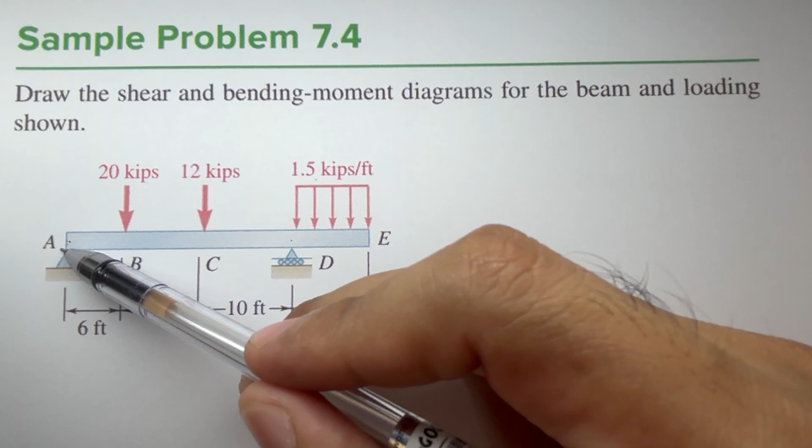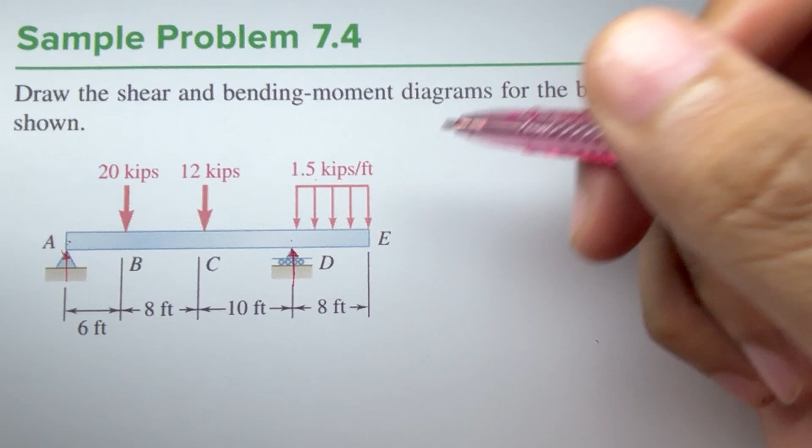To get the reactions at point D and point A, we can use summation of moments at point A to get the reaction at point D. So, summation of moments at point A.

Before we can do summation, we have a distributed load here. What we do is replace this distributed load by a concentrated load applied at the centroid. Since this is a rectangle, its centroid is located along this line at the middle. Since the whole distance is 8, this should be 4.

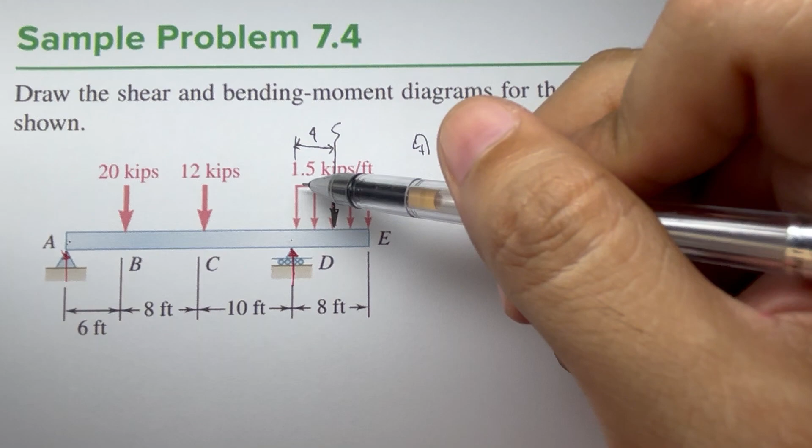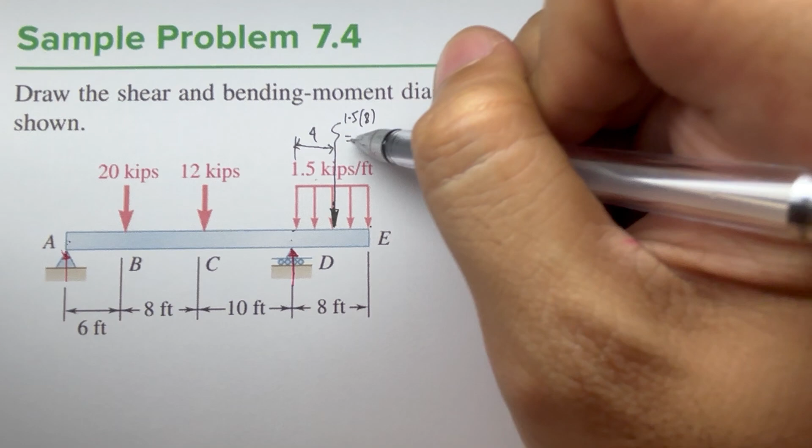So what will be the magnitude? The magnitude of the concentrated load replacing this distributed load is just equal to the area of this distributed load, that is 1.5 times 8. We have this equal to 12 kips.

Now we're ready to sum all the moments at point A. At point A, this one is clockwise, so negative. We have positive and negative. Negative 20 times the moment arm, which is 6. This one is negative 12 times the moment arm, that is 8 plus 6, we have 14. This one is D, which is positive, times its moment arm.

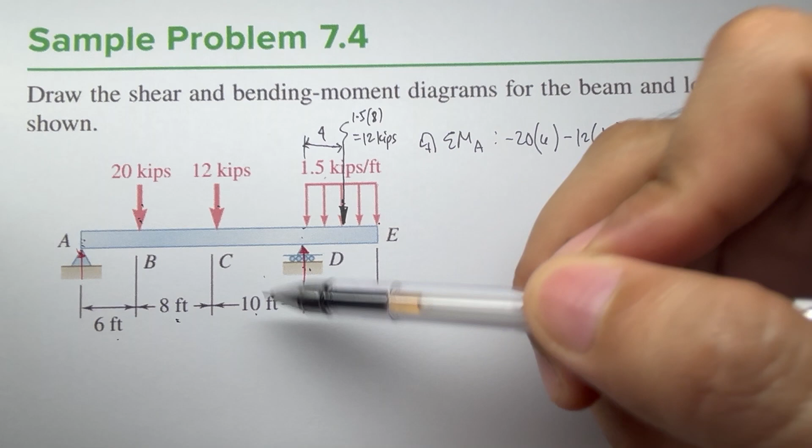We have 6 plus 8 plus 10, we have 24. Lastly, for the concentrated load, we have 12 kips negative, kasi clockwise, times its moment arm, which is 8 plus 6 plus 8, 14 plus 10, 24 plus 4, we have 28. That is equal to 0.

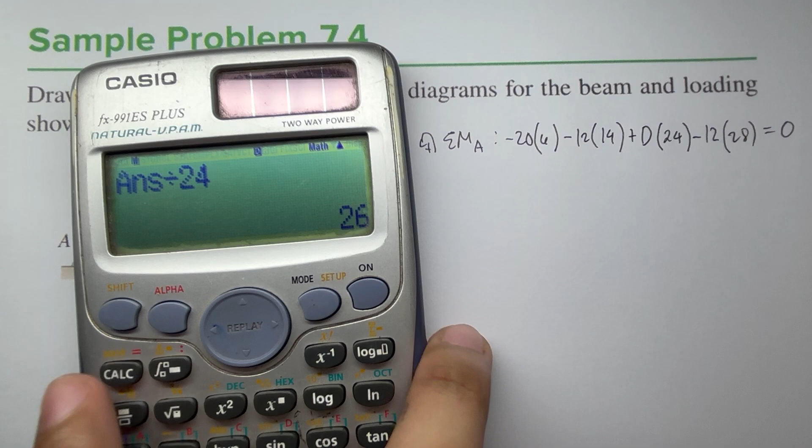If we solve that, we have 20 times 6 plus 12 times 14 plus 12 times 28, divided by 24, we have D equal to 26, and it's positive 26 kips. So our D here is equal to 26 kips.

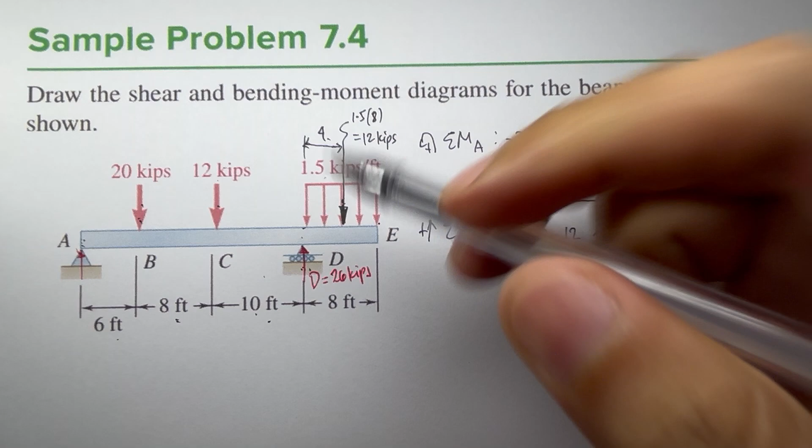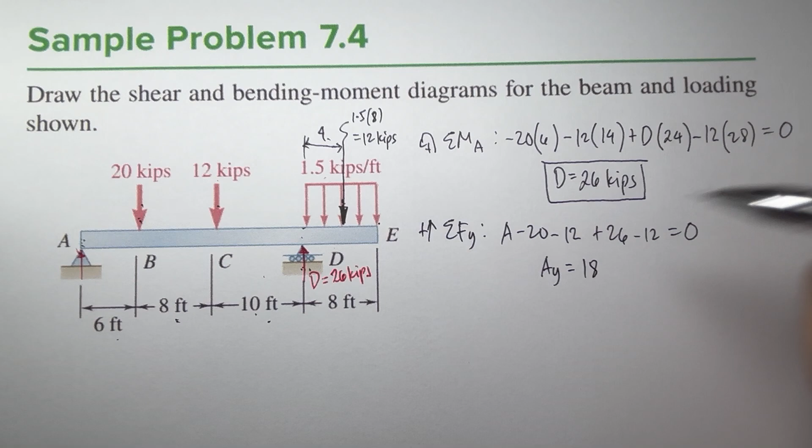How about AY? We can use summation of forces along Y, positive upward. That would be A positive. We have negative 20, negative 12, positive 26, and negative 12 equal to 0. If we solve that, we have 20 plus 12 plus 12 minus 26, we have 18. So our A here is equal to 18 kips.

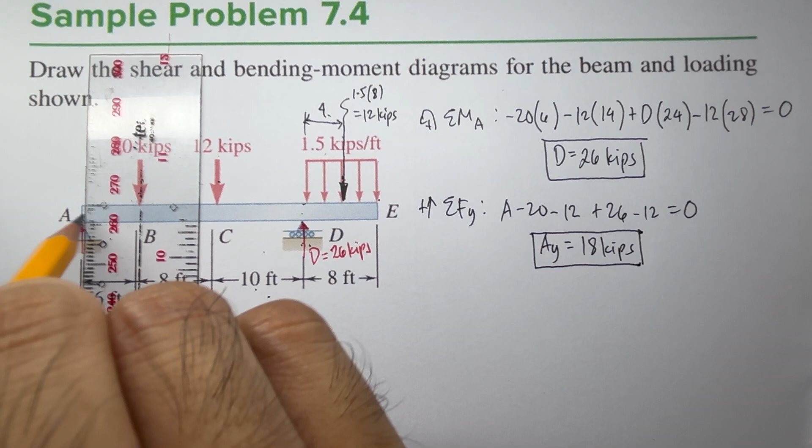Okay, now we're ready to draw the shear and moment diagram. What we do here is project every point. So we have 5 points here, point A, B, C, D, and E.

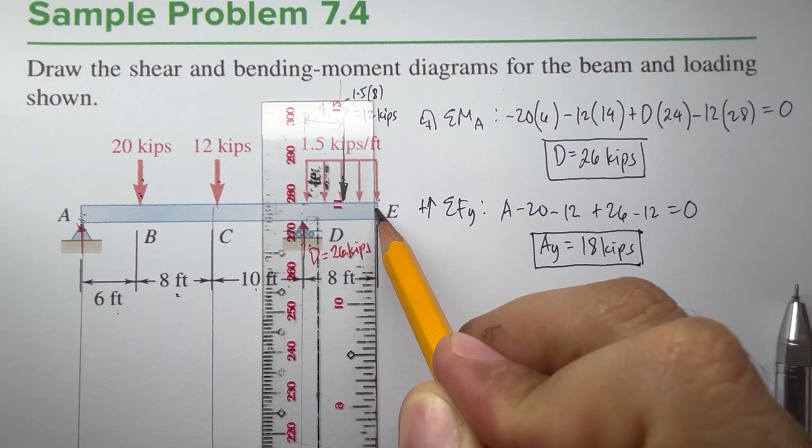From our previous video, we said that our shear curve is 1 degree higher than our load curve. Same as with the moment curve, our moment curve is 1 degree higher than our shear curve. So if we say, for example, our load curve here, we have our shear curve and our bending moment curve. If our shear curve is linear, that is x to the 1, linear...

Since our moment curve or bending moment diagram is 1 degree higher than our shear diagram, this one becomes quadratic. If our shear curve is linear, our moment curve is quadratic, kasi 1 degree higher. So if our shear curve is 1 degree higher than our load curve, our load curve would be x to the power of 0, or constant.

Now how about if our shear curve is x to the 0, or constant? What would be our moment curve or bending moment diagram? That would be x to the 1, or linear. How about the load curve? Since the shear curve is 1 degree higher, the load curve would be 0. So if the load curve is 0, the shear curve would be constant, and the moment curve should be linear. So that's it.

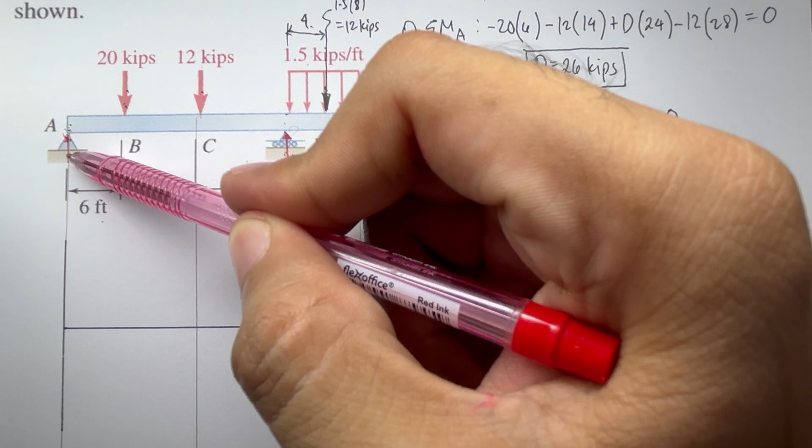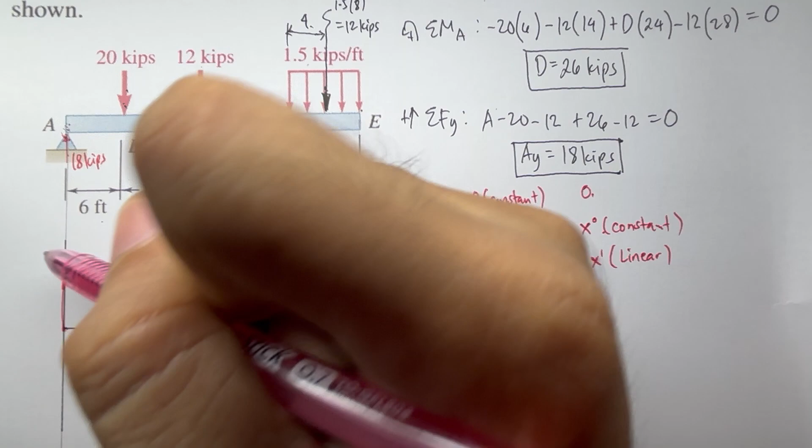Now let's draw our shear diagram. In drawing our shear diagram, we look at point A first. A experiences a shear force at this point, and its value is 18 kips. So therefore, at point A, the shear diagram would rise to this point. It should be at 18 kips. This is for our shear.

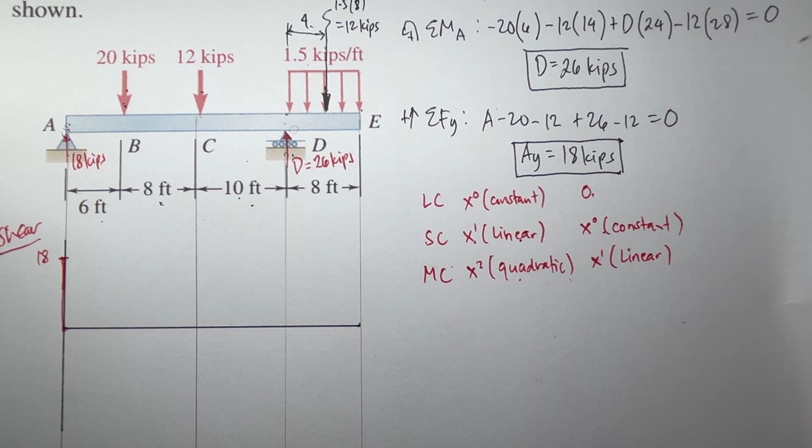Kanina sabi ko, kung yung load curve natin from A to B ay wala tayong nilagay na load, therefore yung load curve natin is 0. Kung yung load curve natin is 0, yung shear curve natin is x to the 0 or constant. Ano yung graph ng constant? Flat line lang. Hindi ko pa na-project itong B natin.

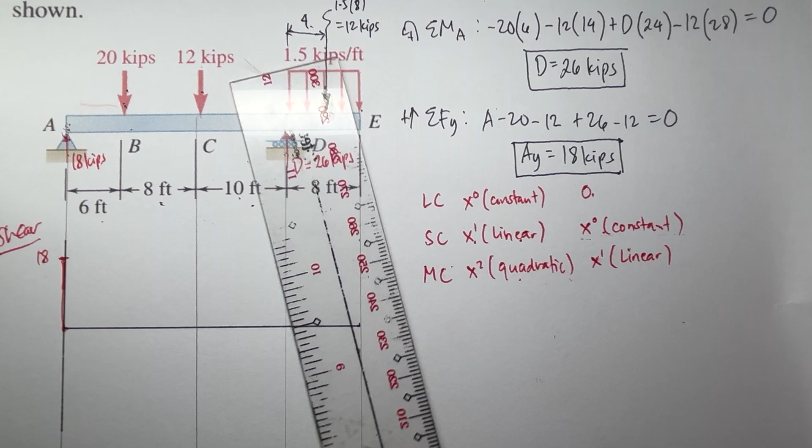So somehow yung B natin, ayan. So from A to B, yung shear natin is constant. So expected that sa ating moment curve, magiging linear yung graph natin.

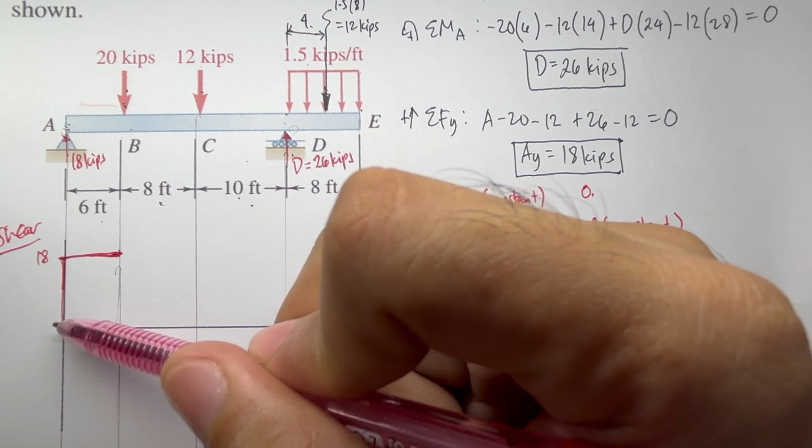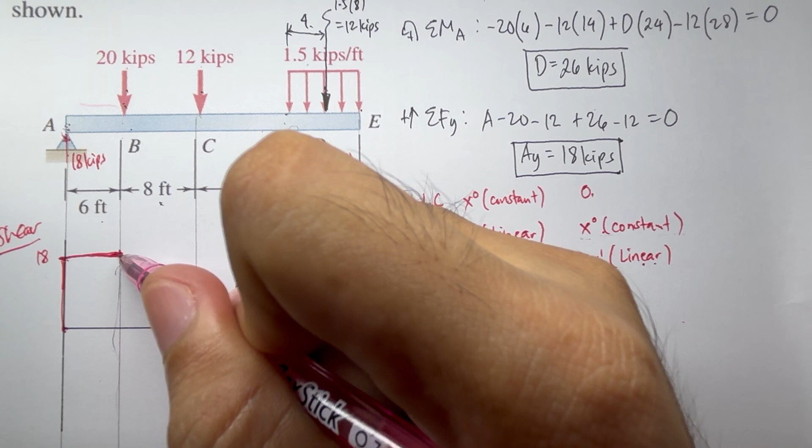Okay, so ayan. So from point A, nag-raise tayo ng 18 kips, and then to B, constant, and then from B, bababa ka ng 20 units. Kung bababa ka ng 20 units, so yung height na ito is 18. So ito siya is negative 2, kasi 20 minus 18, we have negative 2.

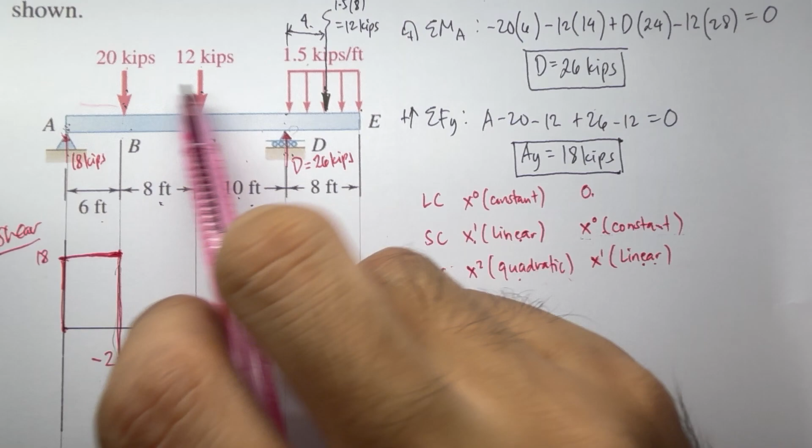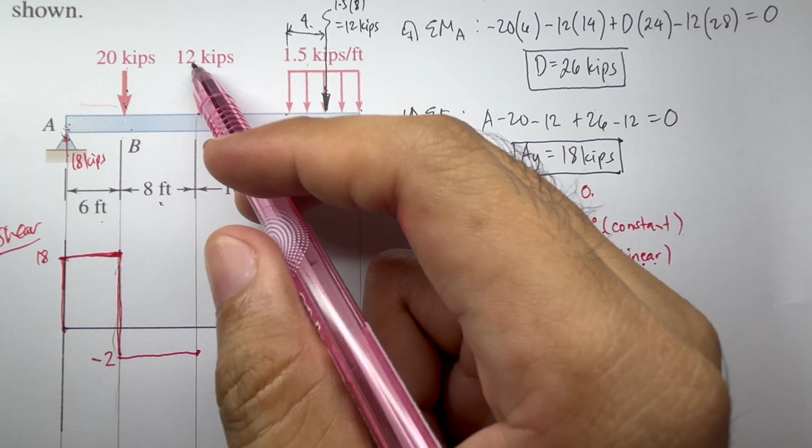And from B to C, wala tayong load, so therefore constant din yung shear natin. Constant din yan. And then from C, meron tayong shear na 12 units downward, so bababa tayo by 12 units.

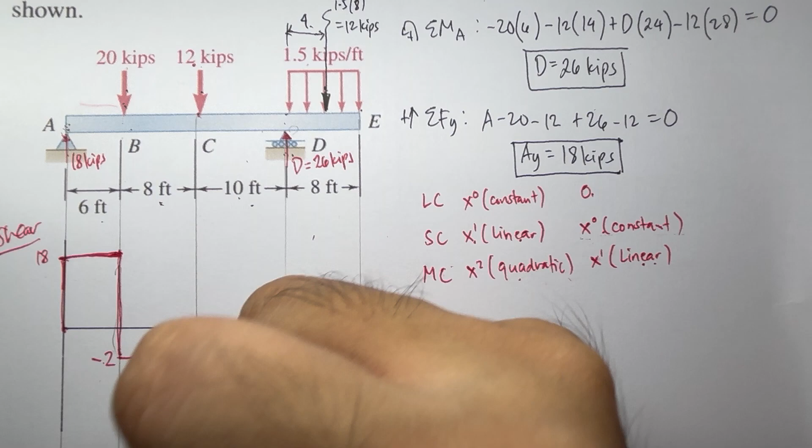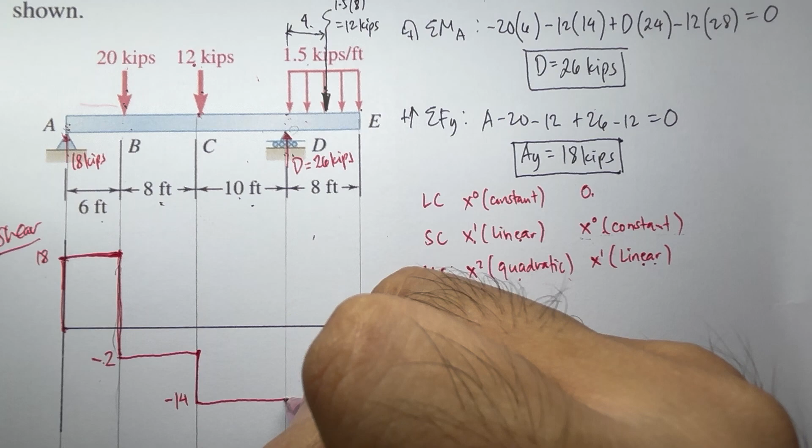So 12 units downward plus negative 2, we have negative 14. And from C to D natin, since ito siya is 0 din yung load, so therefore yung shear natin is constant. And then yung D natin dito at point D, tataas daw tayo ng 26, so magdadagdag tayo ng 26 units upward dito. So kung ito siya 14, dapat yung total 26. This should be plus 12, kasi 26 minus 14, we have 12.

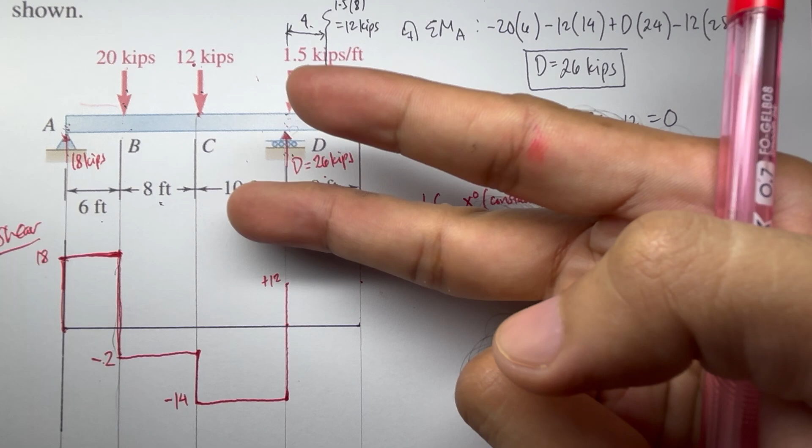Now, from point D to point E, meron na tayong load, at yung load natin ay constant. Di ba yung constant na load, yung shear natin should be linear. Kung linear yung shear, dalawa lang yung kailangan nating points para makagawa ng linya. So since meron na tayong 1 point dito, hanapin natin yung shear at point E para dalawa na yung points natin. Paano natin mahanap? We have our formula as

V2 minus V1, sa case na ito VE minus VD, that is equal to the negative area under the load curve from D to E. Ano yung area na yan? Itong area na ito. We have rectangle, so base times height. Ano yung base? We have 8. Ano yung height? 1.5. So 8 times 1.5, we have 12.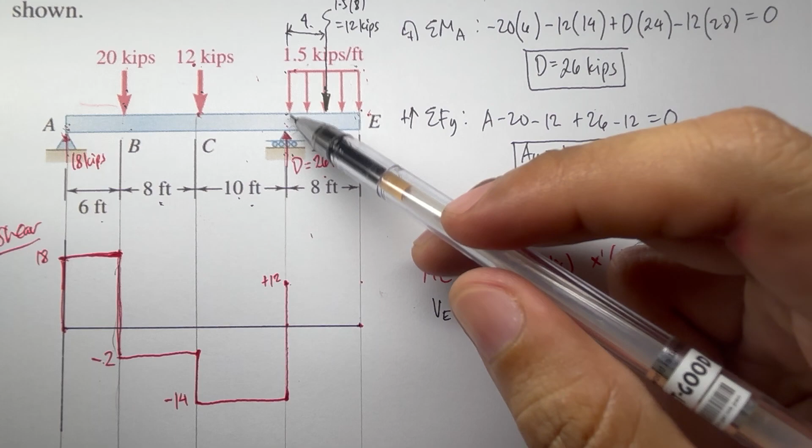So this one here, we have negative base, which is 8, and height, which is 1.5. Ano yung VD natin? Yung VD natin, this one here, is 12. So therefore yung VE natin is just equal to 12 minus 8 times 1.5, which is also 12. So therefore yung VE natin is just equal to 0, at this point.

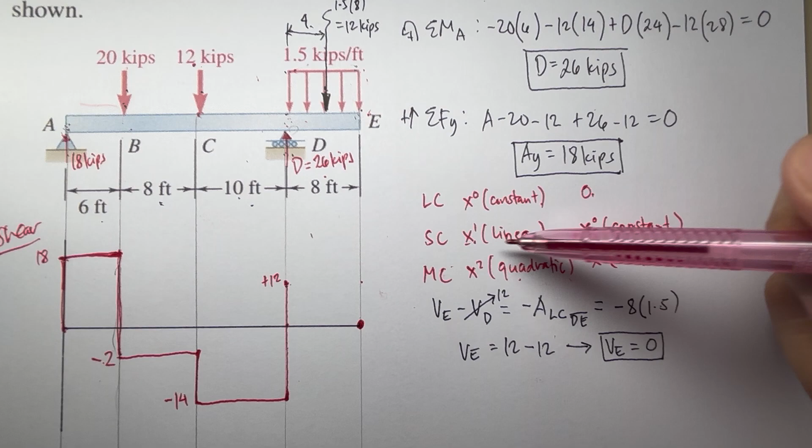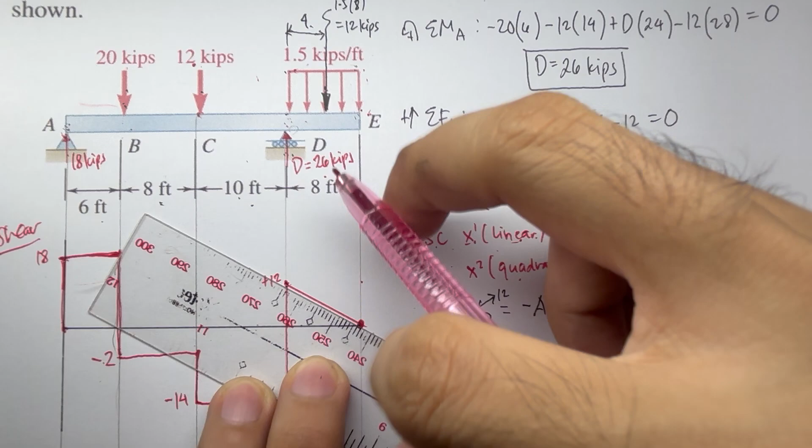Ano yung sabi natin kanina? Yung shear curve natin is linear, so therefore point D and E is connected by a line. So technically, ito na yung shear curve natin. Ayan. Now let's proceed with our load bending moment diagram.

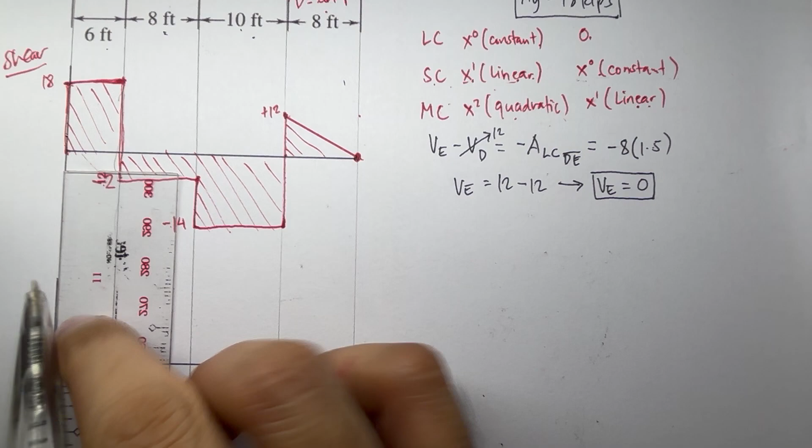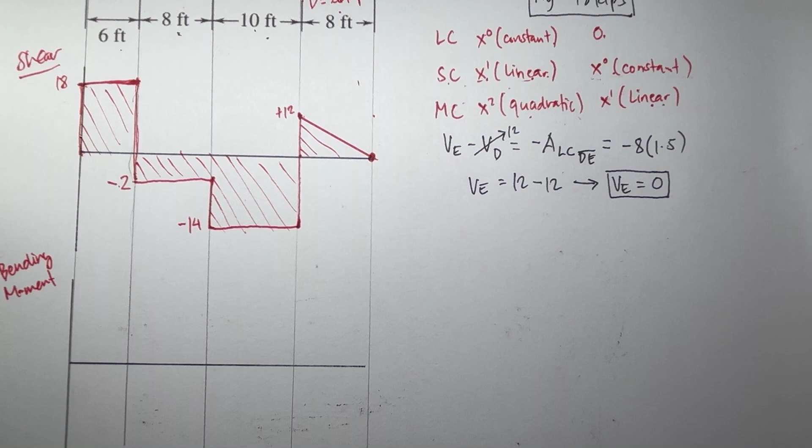So for our bending moment diagram, drawing lang tayo. Ayan. So this one here is for the bending moment. Okay, so yung bending moment natin, ano yung formula natin? We have

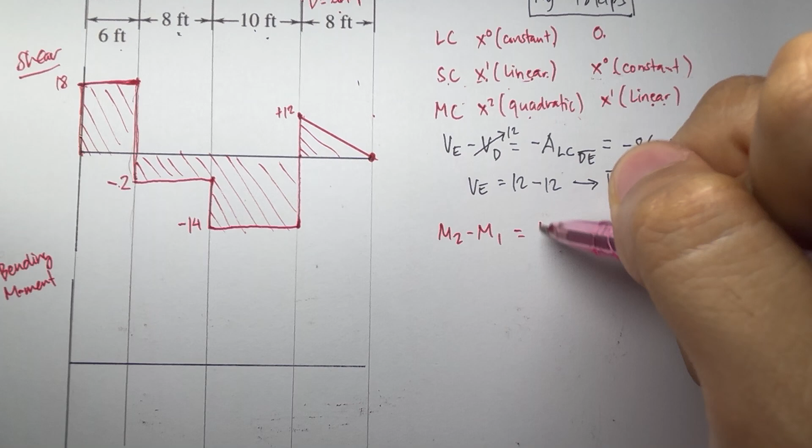M2 minus M1 is just equal to the positive area under the shear curve from 1 to 2. So ayan lang yung formula. So if we try to apply this expression here to create the bending moment, we have how many points here? This one is point A, this is point B, this is point C, point D, and point E natin.

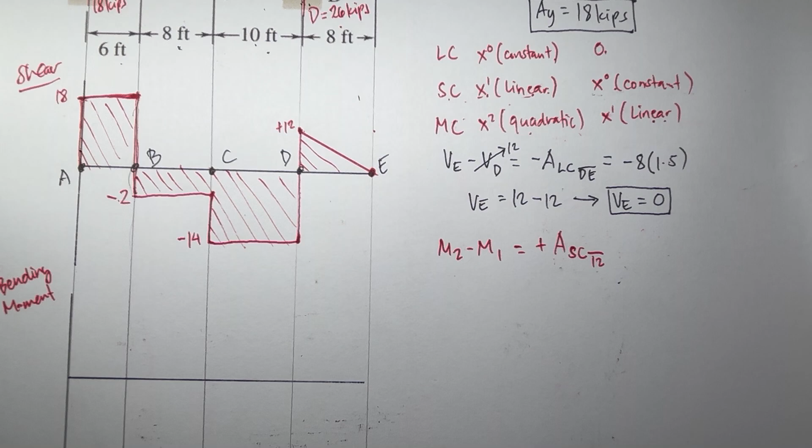So applying this equation here, we have MB minus MA is just equal to the positive area under the shear curve from A to B. We also have MC minus MB is just equal to the positive area under the shear curve from B to C. And then we have MD minus MC is just equal to the positive area under the shear curve from C to D. And then lastly, we have ME minus MD is just equal to the positive area under the shear curve from D to E. Okay, so solve lang natin ito.

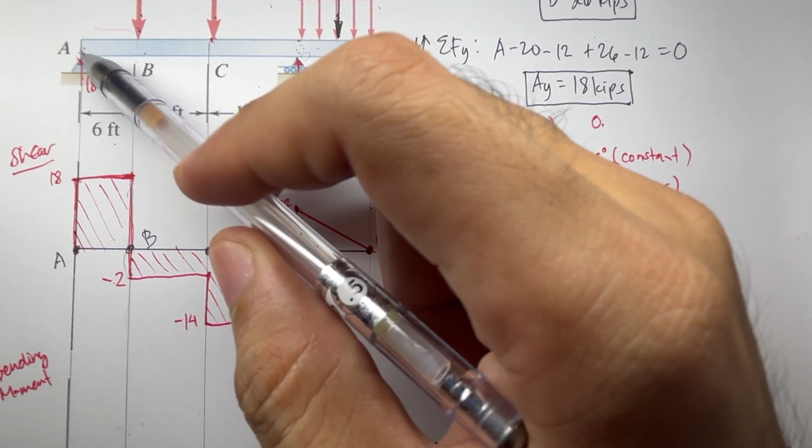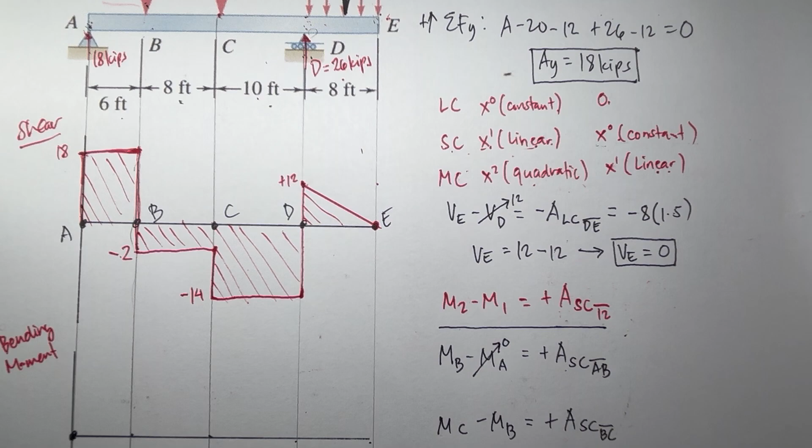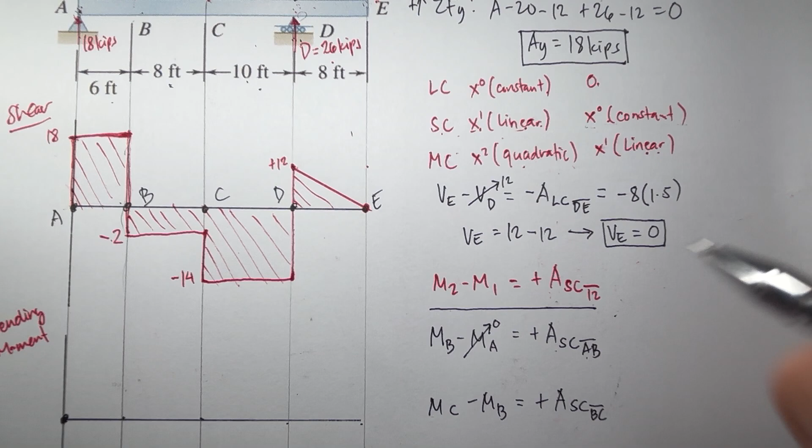Again, ano yung area nito? So kung ito yung A, B, C, D, E na isolve natin, may moment ba tayo sa A? Wala tayong moment, so therefore yung moment natin at point A ay 0, directly 0. Kukunin lang natin yung area under the shear curve from A to B. Ano daw yung area na ito? Area na ito is just a rectangle, so that is base times height. Ano yung base? 6. Ano yung height? 18. So this one here is 18 times 6.

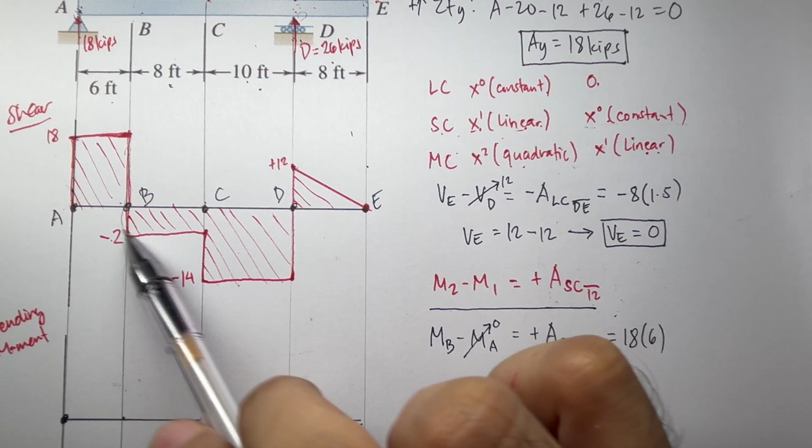The same as with here, from B to C. The area here, what is it? Base times height, or 8 times negative 2. How about this one? Rectangle pa rin, base times height. So that is 10 times negative 14.

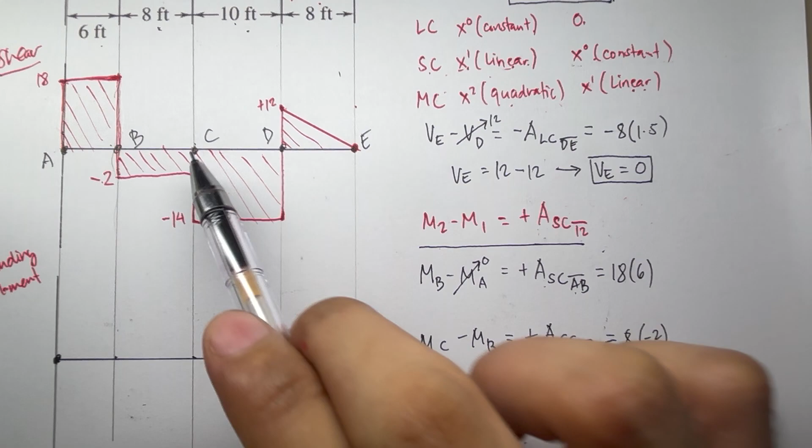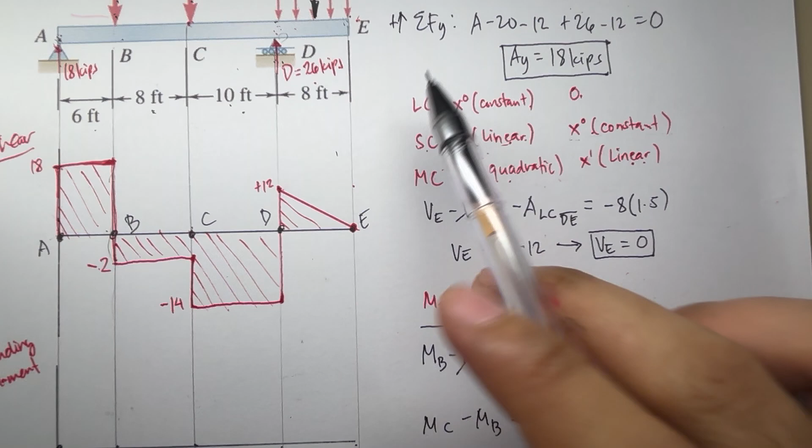And then lastly, from D to E, what is the area here? This area is the area of a triangle. So the area of the triangle is 1/2 base times height. The base is simply just 8, and the height is 12. So that is 1/2 times 8 times 12. Let's just solve this.

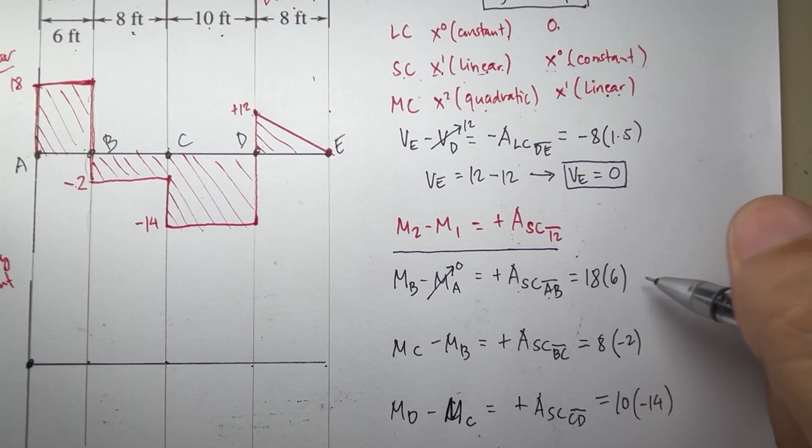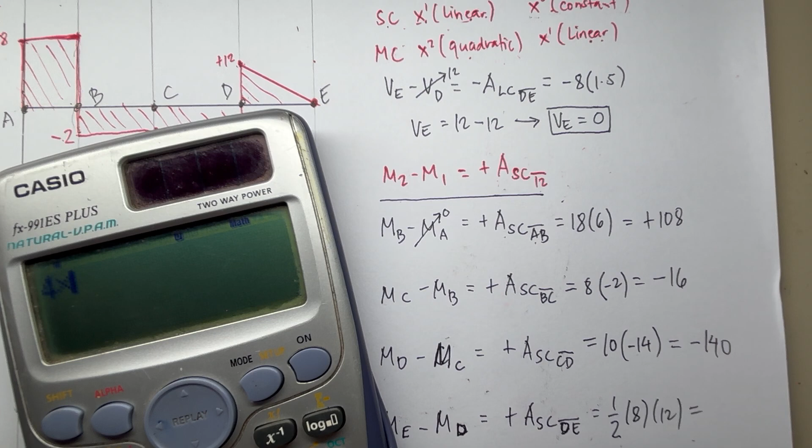We have 18 times 6, we have positive 108. This one here, we have negative 16. And then this one here is negative 140. And then lastly, we have 4 times 12, we have 48.

Positive. So from this expression, knowing that MA is 0, our MB here, MB is directly equal to 108. So MB is equal to 108.

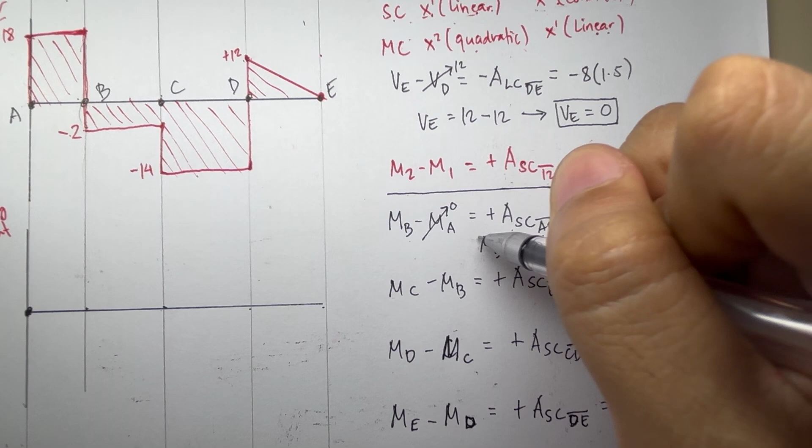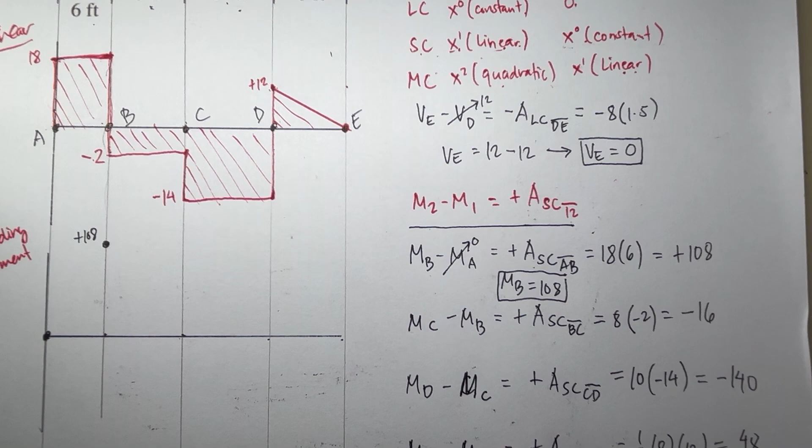So our MB is somehow here, positive 108. Now what is the graph? Knowing that this is constant, what is the next graph? Constant, then linear. So therefore, since this is constant, here we have linear. Linear meaning we just connect this with a straight line.

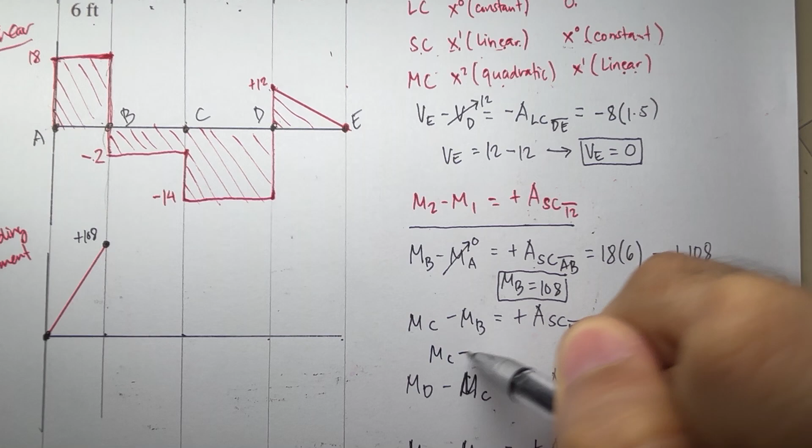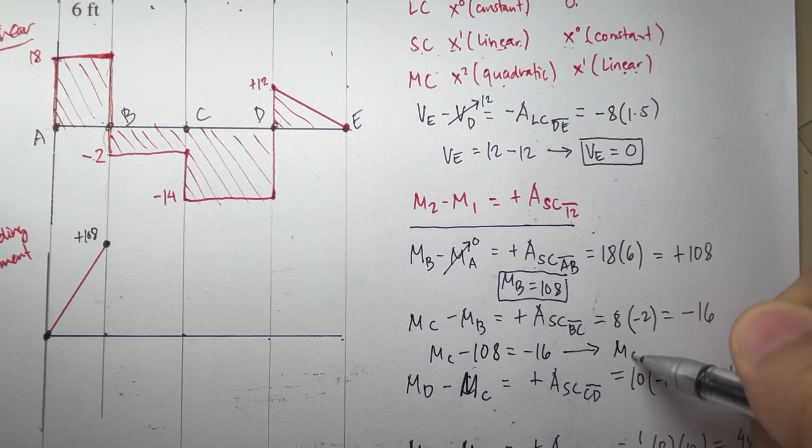So how about this? MC, here at C. So MC minus MB, what is MB? We have 108. So MC minus 108 is equal to negative 16. So from this expression, we get MC equal to 108 minus 16, we have 92, and it's positive. The same pattern, if we have constant here, the next is linear. So at point C, somewhere here, we have plus 92, and it's still linear, so we connect this with a straight line.

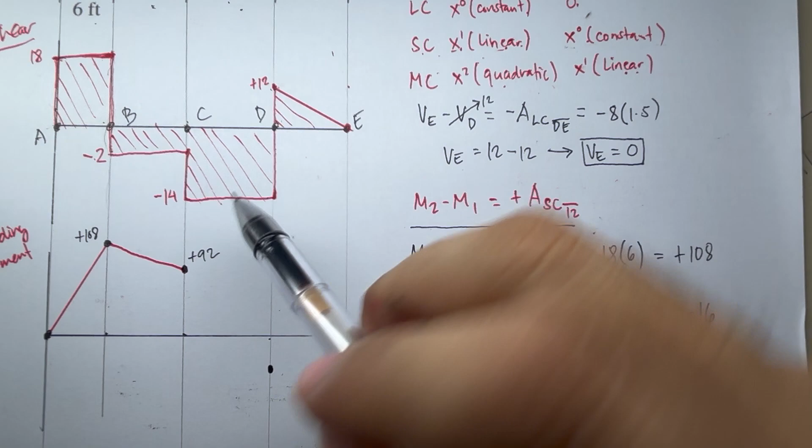And then for the next, we have MD. What is the value of MD? MD minus MC, which is 92, is equal to negative 140. So MD equals negative 48. So our MD is negative. So let's say it's somewhere here. And since this is constant, the same pattern, the next is linear, so we connect this with a line.

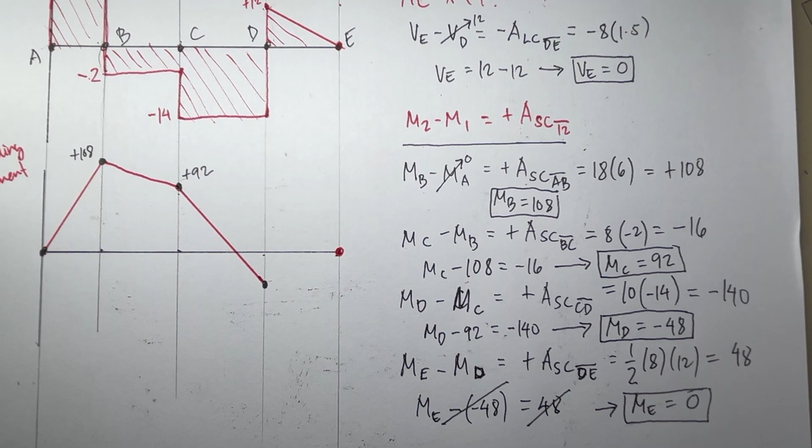Now lastly, we have ME. What is the value of ME? ME minus MD, which is negative 48, is equal to 48. So this cancels out, we have ME equal to 0. So our ME is here at 0. If that's 0, knowing that this one is linear, what is next after linear? Should be quadratic. So the graph connecting D and E is a parabola.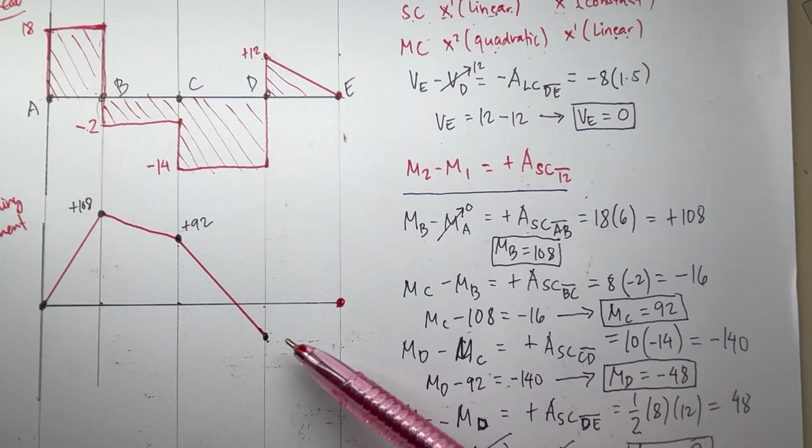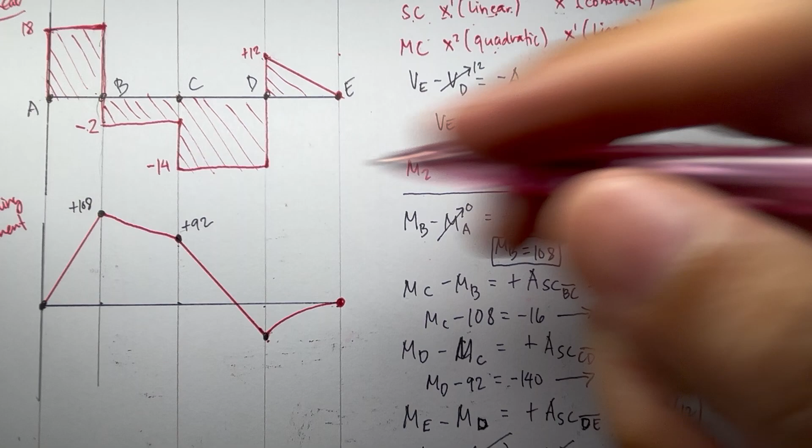But is it frowning or smiling? As I said in the previous video, if the shear is decreasing, the grade decreases, it really sags. So therefore, this is concave downward, it frowns. So this is our moment diagram.

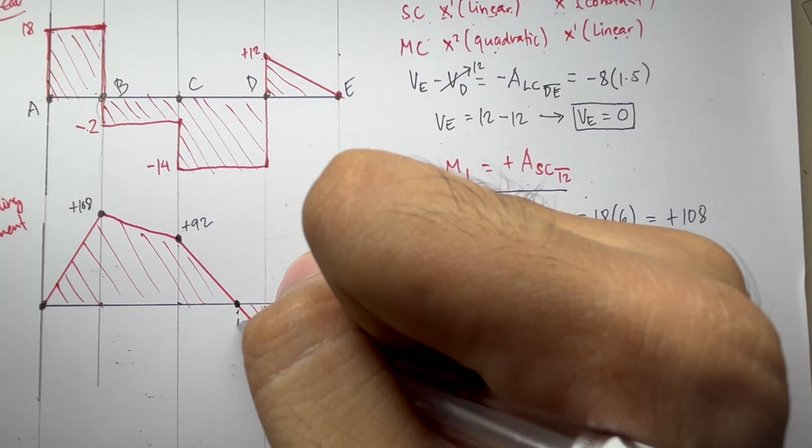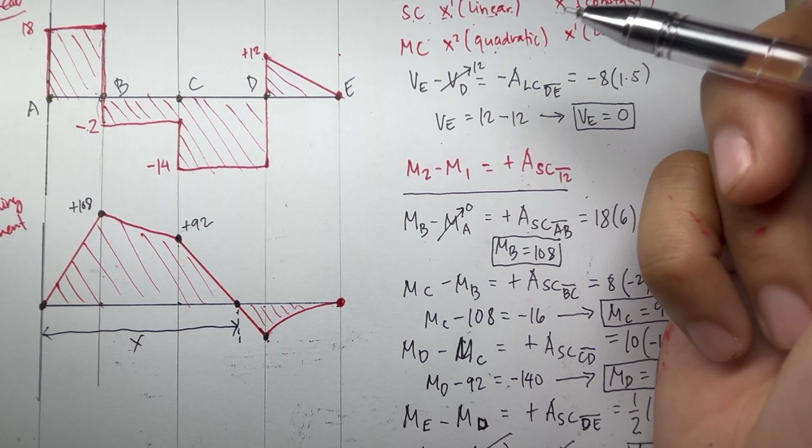Now if you're not satisfied and you want to find the distance where the moment becomes 0, like this one here, if you want to find what this distance is, let's say we replace that with value x. How do we get that? Let's say this point here is point F. We project this upward, so basically this is the area we want, at segment C to F.

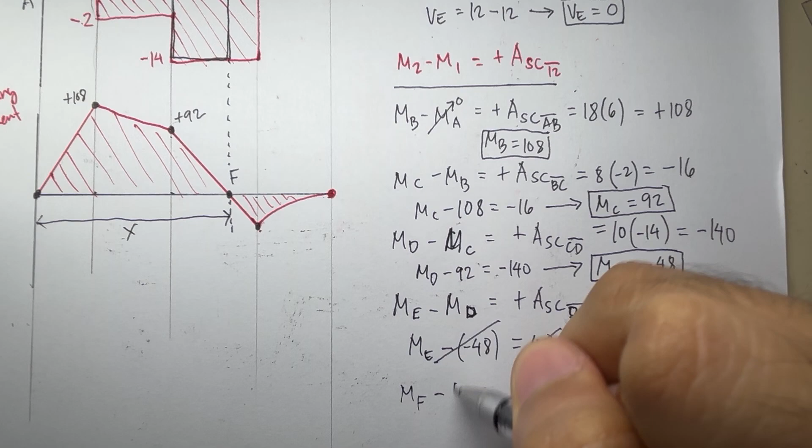So if you want to get that x, how do we get it? We simply substitute into the formula. We have MF minus MC. So MC and MF, this is our point 1, this is our point 2. It's just equal to the positive area under the shear curve from C to F. So what is the value?

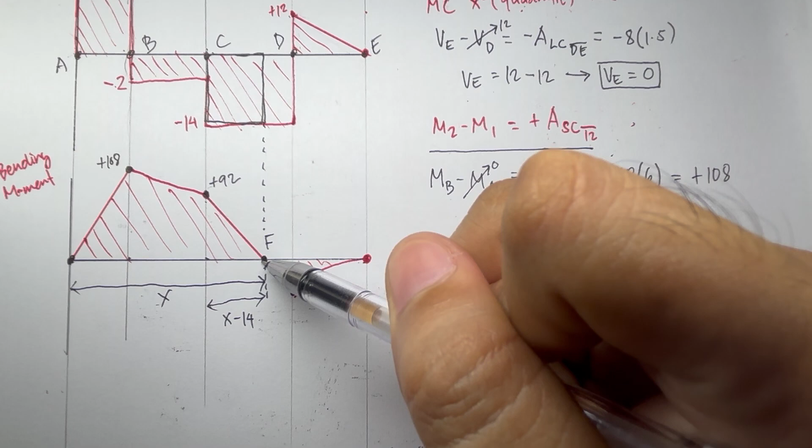It's still a rectangle, so that is base times height. What is the height? Negative 14. What about the base? So basically the base is this distance here. What is this distance? That is just x minus the distance 14 here.

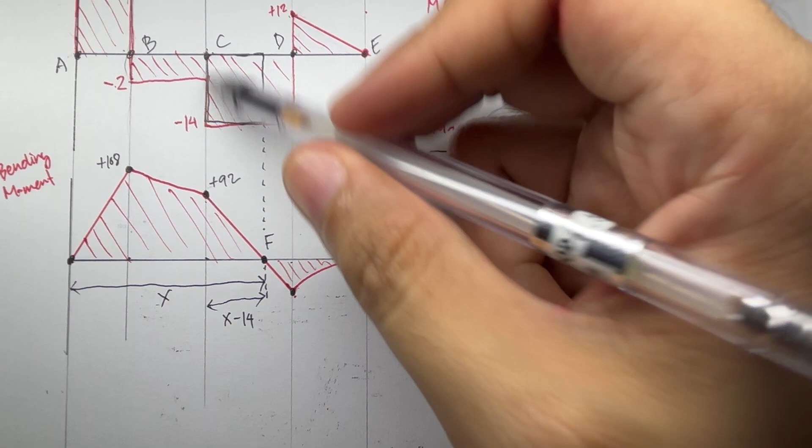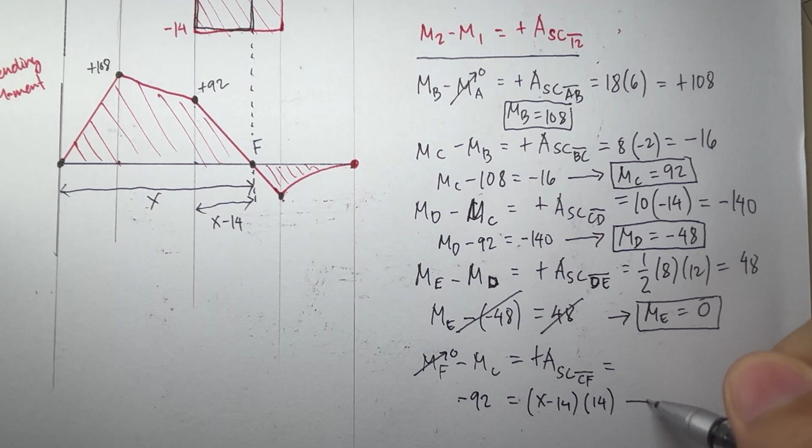So let's substitute. What is MF? If you'll notice, our F is at 0 on y, so therefore MF is 0. How about MC? MC is somehow 92. So we substitute, negative 92 is equal to the base, which is x minus 14, times the height, which is 14. So if we solve this, we get x equal to...

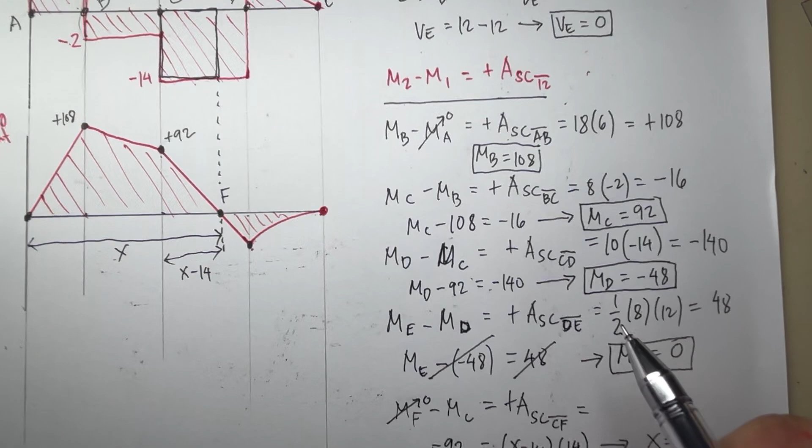The height is negative 14, so this should be negative. Let's solve this, we have negative 92 minus 14 squared, divided by negative 14. We have 20.57. So that's it.